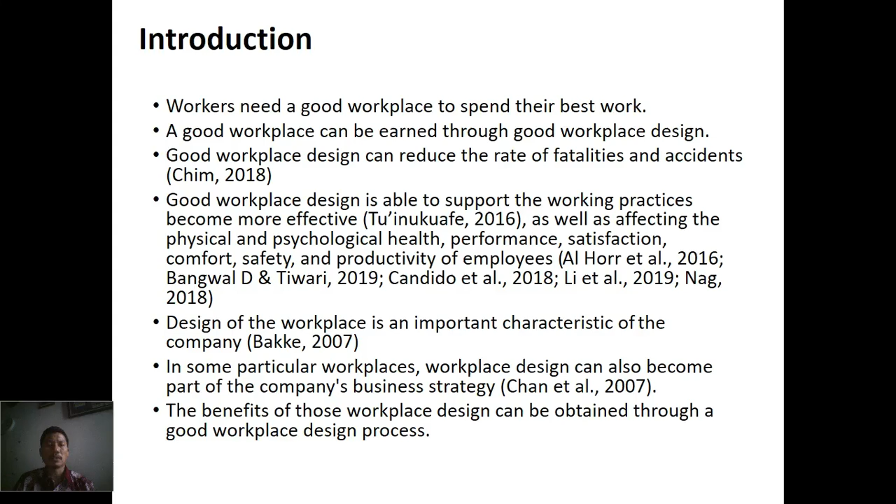In some particular workplaces, workplace design can also become part of the company's business strategy. The benefit of workplace design can be obtained through a good workplace design process. The process of workplace design is complex work, requires a long process, and involves many aspects in the

birth of a workplace. In reality, the practical experience in industrial workplace design in several countries has shown results that are not as expected. More than one-third of workplace designs had to be repaired in the first year. Some countries have published guidelines on the design of the workplace, especially offices, such as Norway and Australia.

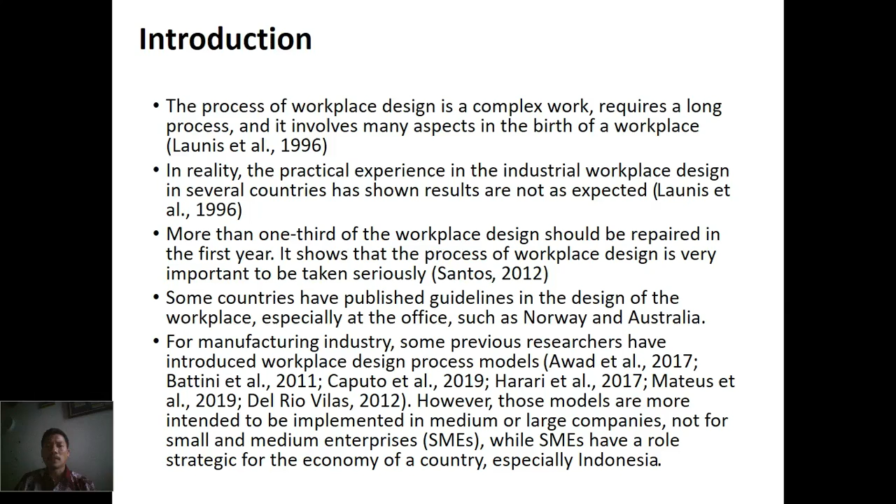For the manufacturing industry, some previous researchers have introduced workplace design process models. However, those models are more intended to be implemented in medium or large companies, not SMEs, while SMEs have a strategic role for the economy of a country, especially Indonesia. Various studies indicate that the environmental conditions in the workplaces of Indonesia's SMEs are less good and do not meet the standards set by the government.

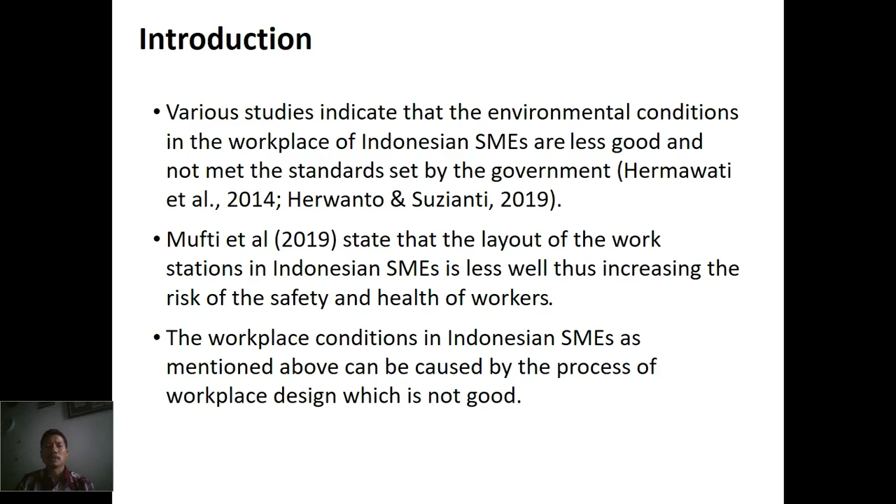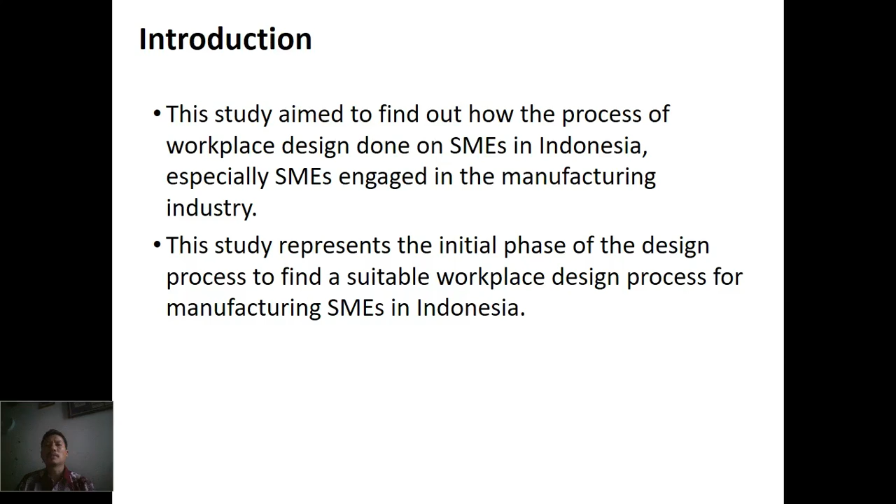The workplace conditions in Indonesian SMEs, as mentioned above, can be caused by a workplace design process which is not good. This study aimed to find out how the process of workplace design is done in SMEs in Indonesia, especially SMEs engaged in the manufacturing industry.

Here is our method in the research. This study was conducted at 3 manufacturing SMEs located in Karawang, West Java, Indonesia. This study began with data collection through interviews with the owners or managers of manufacturing SMEs to determine how the process of workplace design had been done in the SMEs.

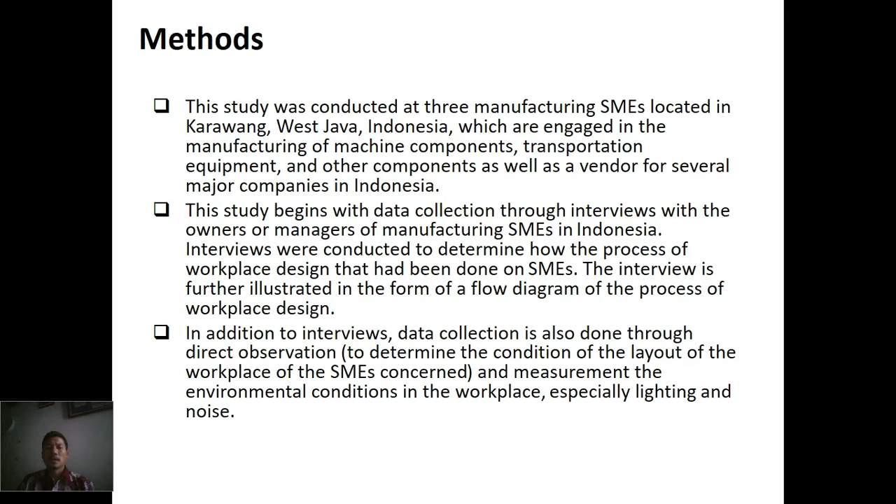In addition to interviews, data collection was also done through direct observation to determine the condition of the layout of the workplace of the SMEs concerned, and measurement of the environmental condition in the workplace, especially lighting and noise.

The results of the lighting and noise measurements were then compared to the standard lighting and noise in the workspace according to the Regulation of the Minister of Manpower number 5 of 2018, to determine whether the environmental conditions, lighting and noise, in the workspace are already compliant or not yet.

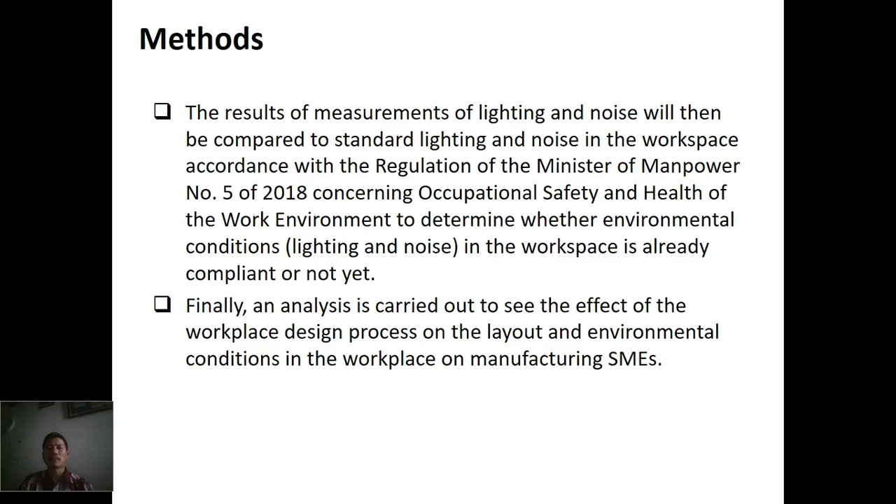Finally, an analysis was carried out to see the effect of the workplace design process on the layout and environmental condition in the workplace of manufacturing SMEs.

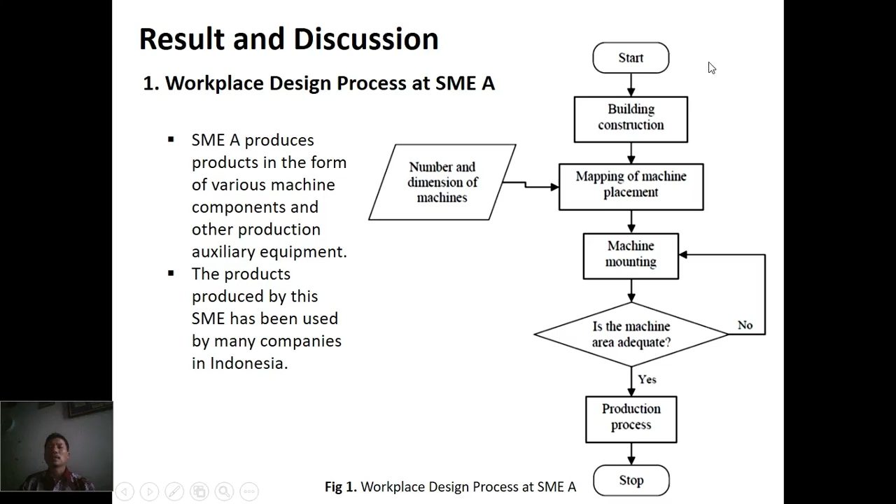Here are our result and discussion. The first is the workplace design process at SME A. SME A produces various machine components and other production auxiliary equipment. The workplace design process at SME A can be seen in this flow diagram. The layout of machines and material in the workplace area in SME A is irregular and not sequential. This resulted in material handling and the movement of workers being blocked.

The level of lighting in the production room of SME A varies from about 14 to 600 lux. According to the Minister of Manpower Regulation number 5 of 2018, the work carried out in SME A requires illumination with an intensity of 300 lux. This means that the lighting in some work areas in SME A is below the standard, while in some other areas it is above the standard.

The noise in the workplace in SME A when all the machines are in operation is above 85 decibels, which means above the specified standard. Another problem that occurs in SME A is a slippery floor due to splashes of coolant from the lathe to the floor, so it is quite dangerous for the workers.

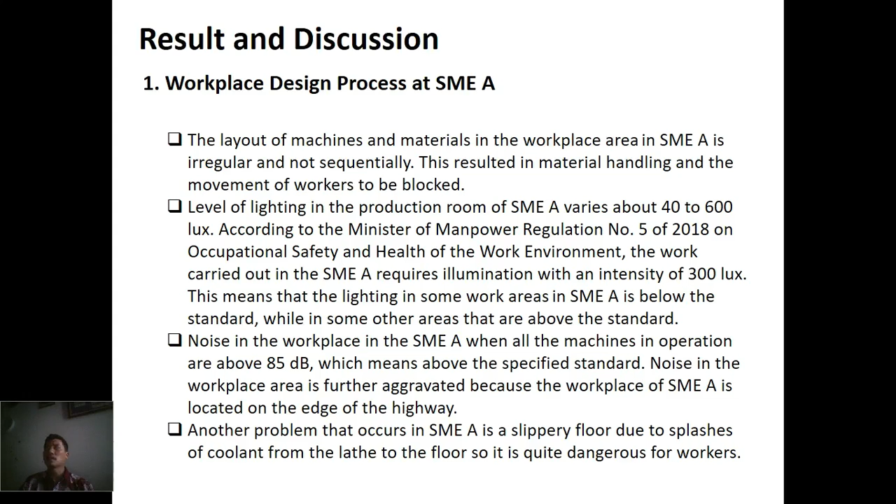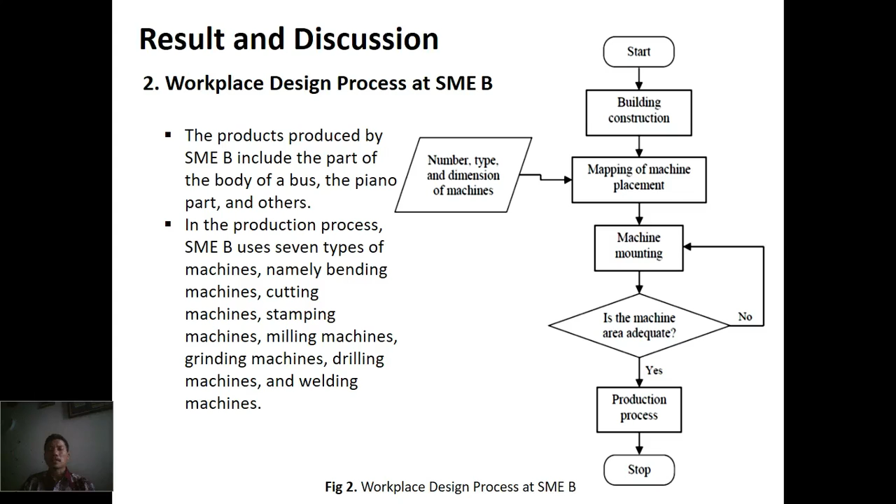The second workplace design process is at SMEB. The products produced by SMEB include parts of the body of buses, the piano part, and others. The workplace design process at SMEB can be seen in this flow diagram.

One of the problems seen in SMEB is machine placement that does not take machine characteristics into account. An example is the placement of cutting machines, stamping machines, and bending machines that are positioned in the same area, resulting in very high noise when the three machines operate together.

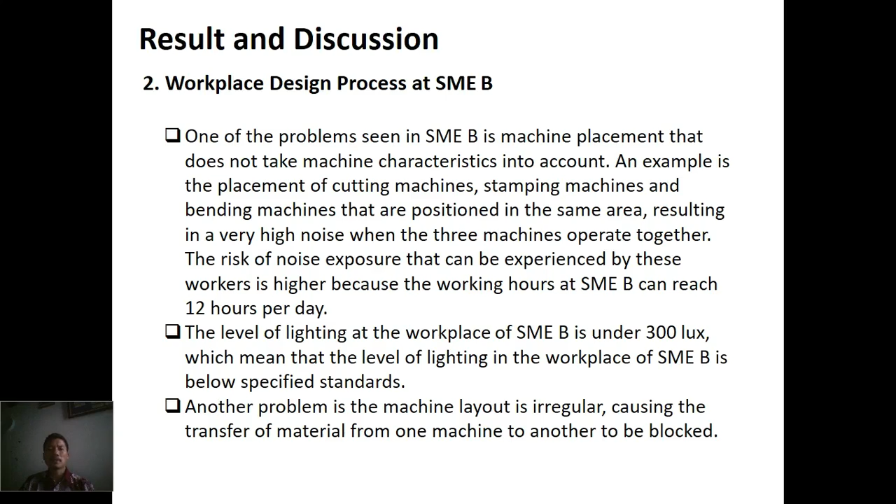The level of lighting at the workplace of SMEB is under 300 lux, which means that the level of lighting in the workplace of SMEB is below specified standards. Another problem is the machine layout is irregular, causing the transfer of material from one machine to another to be blocked.

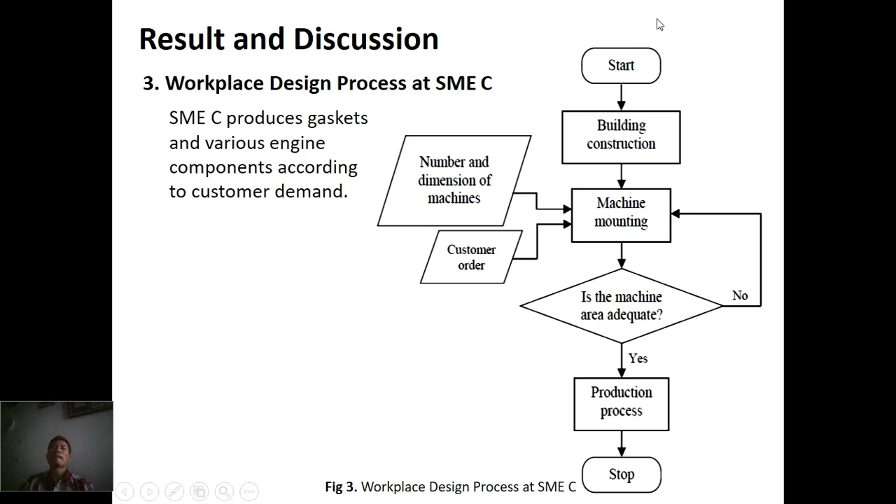The third, workplace design process at SMEC. SMEC produces gaskets and various engine components according to customer demand. The workplace design process at SMEC can be seen in this flow diagram. The problems seen in the working space at SMEC production are raw materials, production machines, and storage of finished goods that are placed in the same area, thus disturbing the material removal process.

Besides, the distance between one machine and another in the sequence of the working process is too far, causing the worker to experience fatigue at the time of the removal of material. The noise condition exceeds the noise level standard, which has been determined following the regulation of Minister of Manpower number 5 of 2018.

The lighting in the workplace uses only a few lights that are mounted on the side of the production room, so the lighting levels on production machines are under the specified lighting standard.

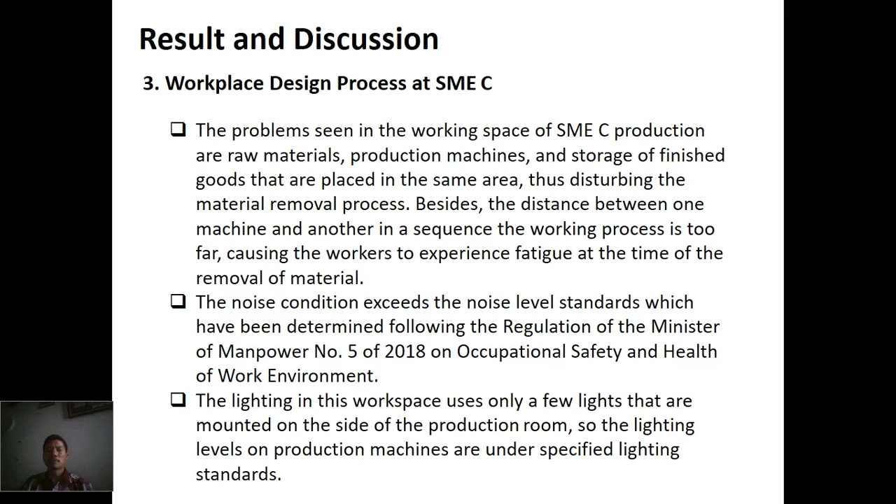The fourth, analysis of workplace design process at Indonesian manufacturing SMEs. The process of workplace design in the three SMEs has many similarities. The three SMEs started the process of workplace design with the construction of the workplace building. Factors considered by the management of SMEs in workplace design are only the number and dimension of the machines, and their placement in the workplace only considers whether the machines fit or not in the workplace, regardless of the sequence of work and other aspects.

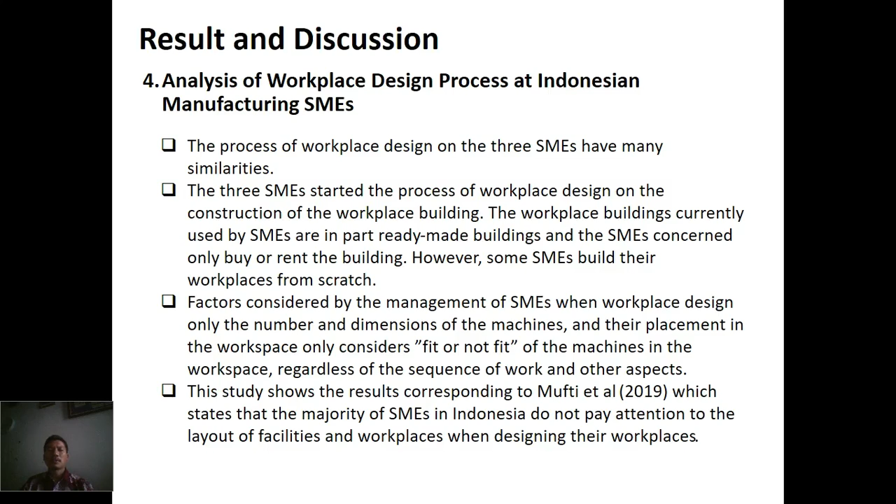This study shows results corresponding to Mufti et al., which states that the majority of SMEs in Indonesia do not pay attention to the layout of facilities and workplaces when designing their workplaces. In general, it can be said that the process of workplace design in the three SMEs has not paid attention to good procedures and important factors in designing workplaces.

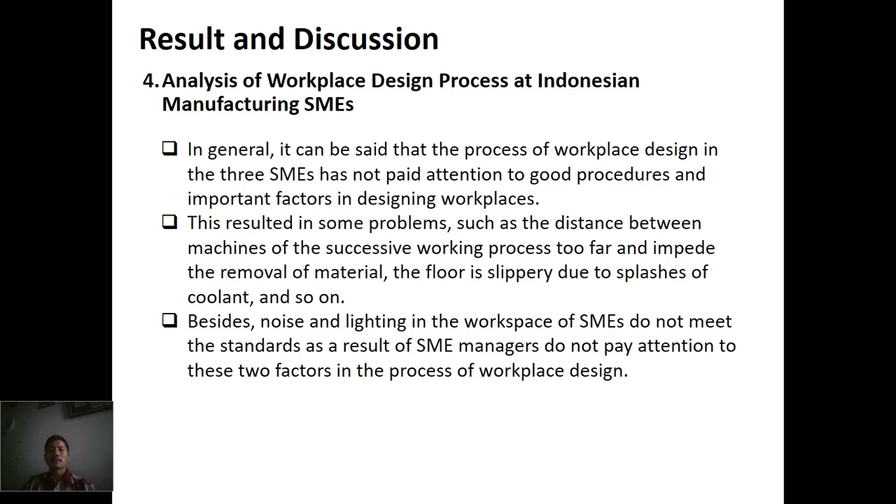This resulted in some problems, such as the distance between machines of successive working processes being too far and impeding the removal of material. The floor is slippery due to splashes of coolant and so on. Besides, noise and lighting in the workplace of SMEs do not meet the standard, as a result of SME managers not paying attention to these two factors in the process of workplace design.

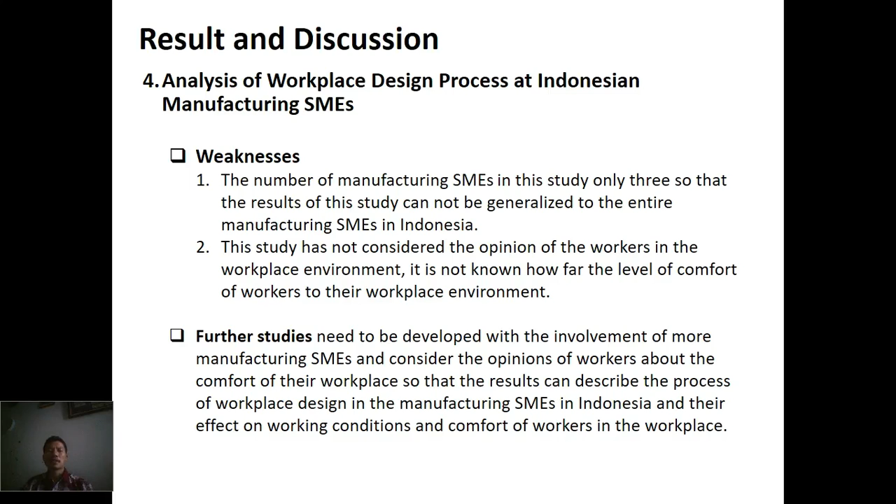The weaknesses of this research are: first, the number of manufacturing SMEs in this study is only 3, so the results of this study cannot be generalized to all manufacturing SMEs in Indonesia. Second, this study has not considered the opinion of the workers in the workplace environment. It is not known how comfortable workers are with their workplace environment. Further studies need to be developed with the involvement of more manufacturing SMEs and consider the opinion of workers about the comfort of their workplace.

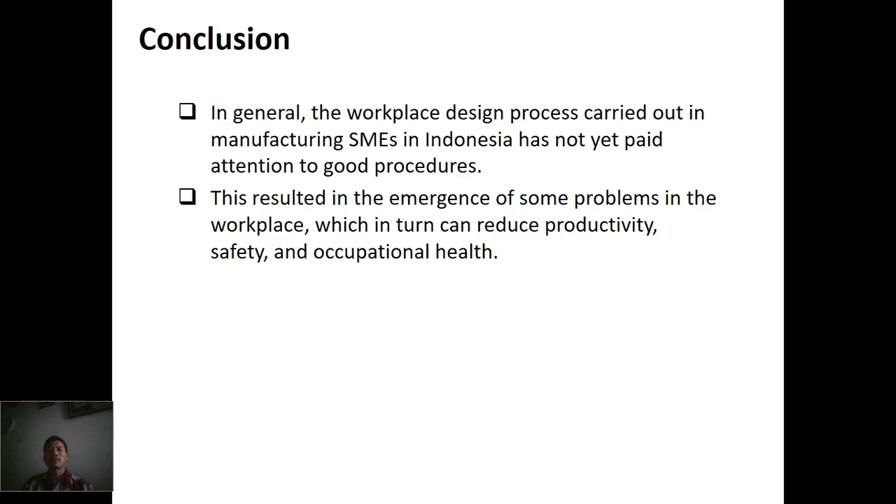Conclusion: in general, the workplace design process carried out in manufacturing SMEs in Indonesia has not yet paid attention to good procedure. This resulted in the emergence of some problems in the workplace, which in turn can reduce productivity, safety, and occupational health. Thank you. Assalamualaikum warahmatullahi wabarakatuh.